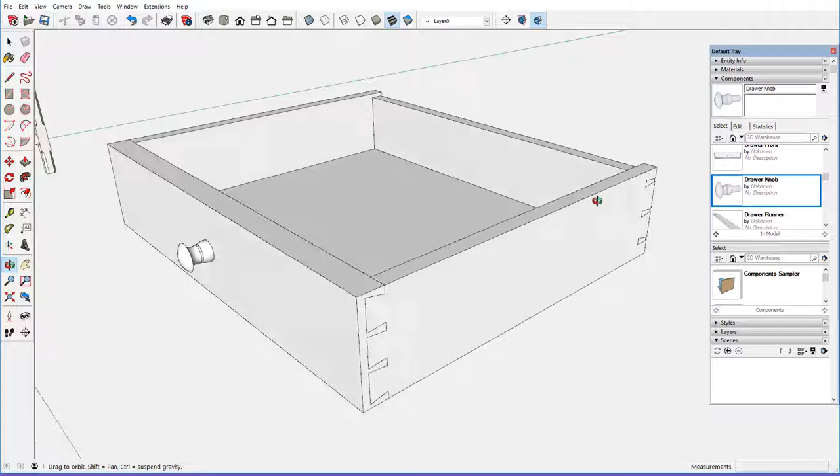I would like to do a couple edits on the drawer construction here. I forgot a couple embellishments that I think are important, and they have to do with the back end of this drawer construction. The first thing is to create a little bevel on the back top of the side component, so I'll edit the side component and draw in a slight bevel on the top edge.

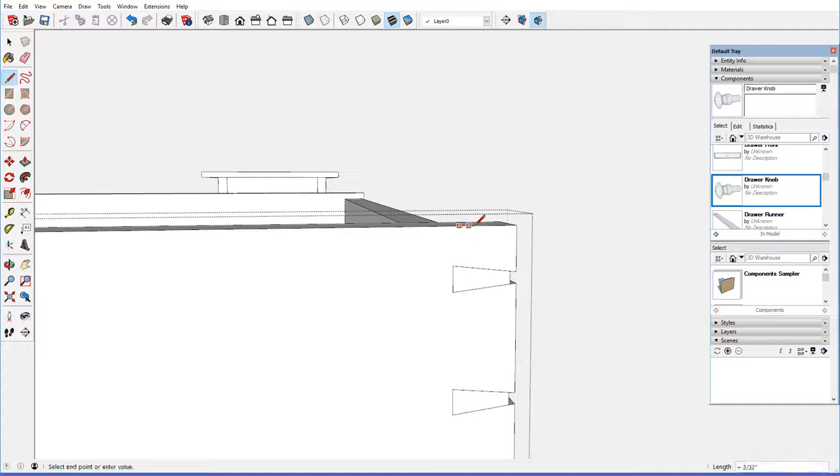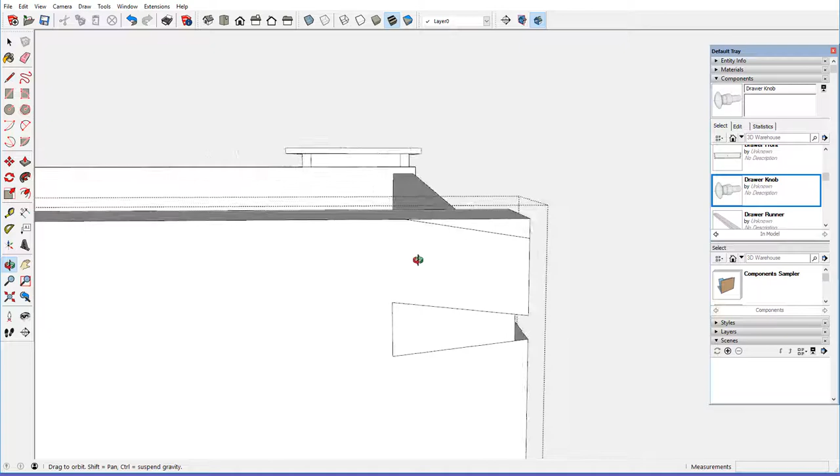This helps get the drawer into the case. It's about the same angle as the dovetail, and in fact I'll go a little bit more than that angle, about like that, and then push that out to the back. So we've got a nice little bevel there on that corner.

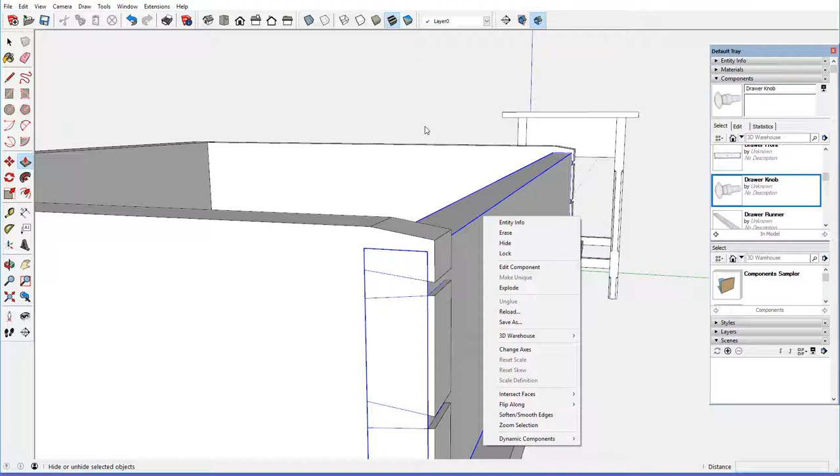The other thing I would like to do has to do with the top edge of the back piece, which needs to be beveled. Before I do that, let me hide this side so we can get a good look here.

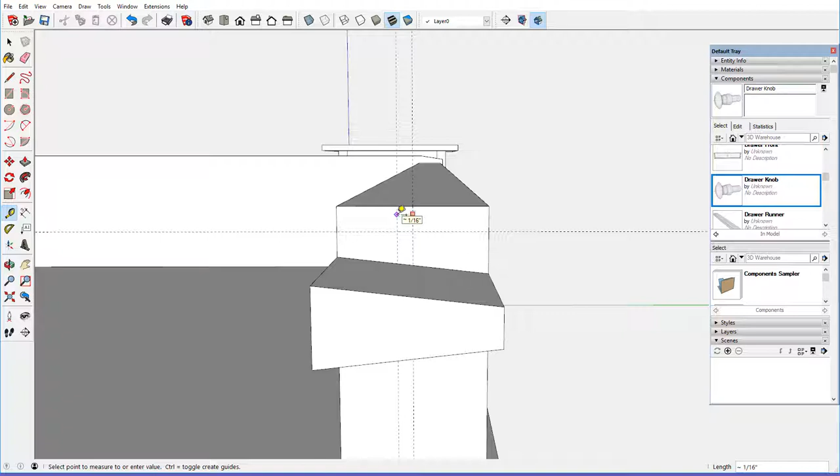I want to bevel this top edge here. I'll find the center and then maybe come down about that far with the bevel, and then go out. There's a little bit of a flat. Let me go about a 1/16, an 1/8 flat up here on the top, so another 1/16 there.

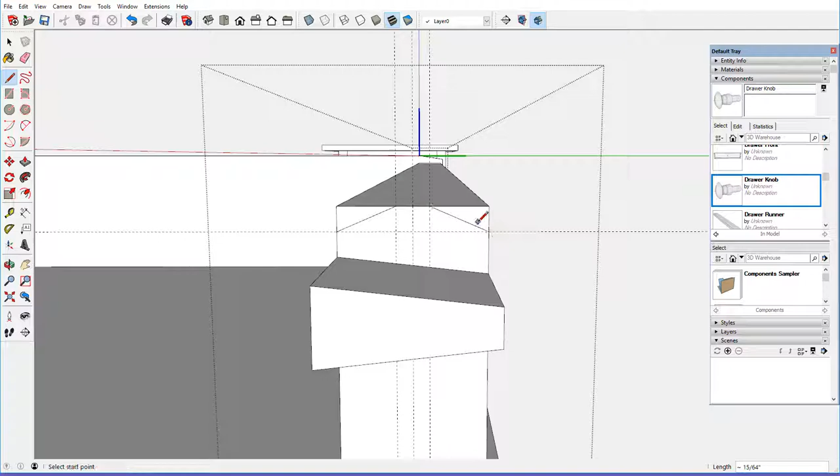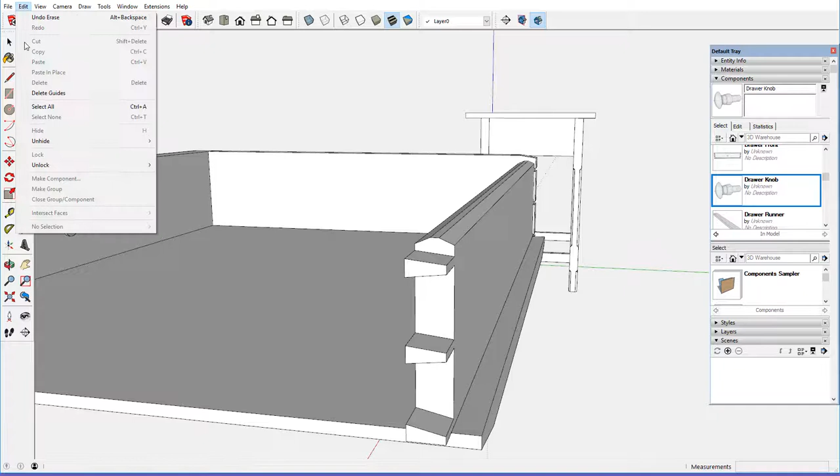Edit the component and draw in the bevel here and here, and then use the push-pull to go back to the back. Double click and close the component, get rid of the guides, and unhide the side.

Oh, there's one other little thing I like to do on the bottom. I want to cut this corner here, bevel off that corner, because that gets broken. I'll just come back maybe about 1/4 of an inch, like that.

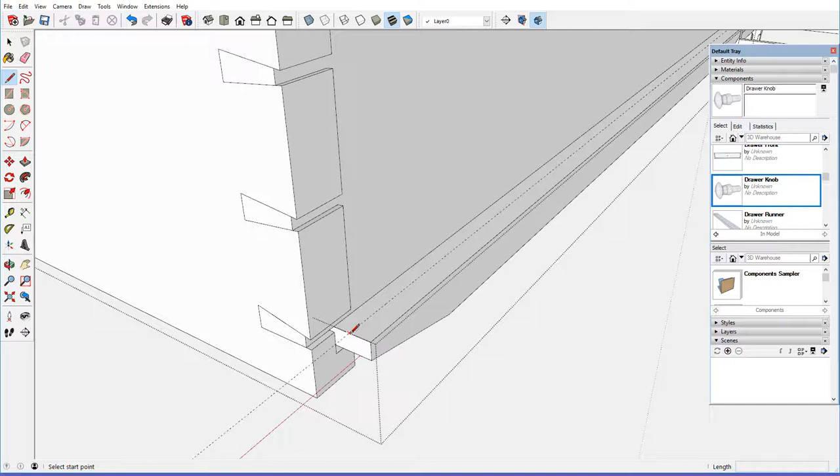Edit the bottom and come across here, and I've got that magenta color that gives me an equal to 45-degree angle.

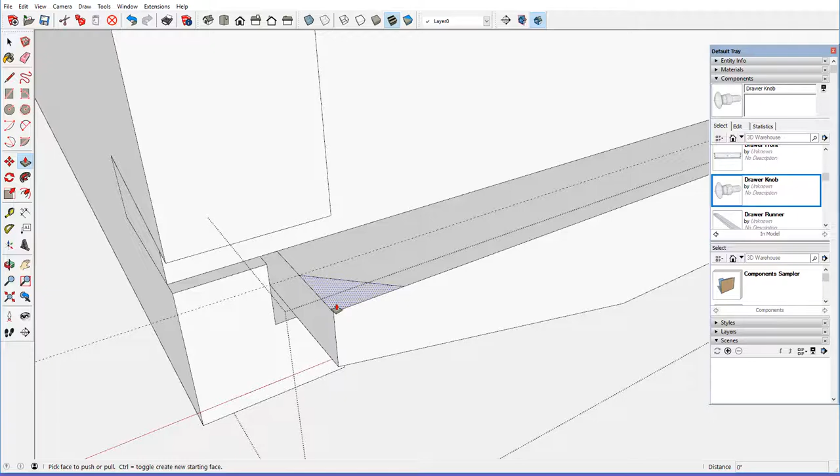Now this is tricky because I'm going through a bevel, another bevel down here, so I have to hit the control key to actually copy. I can't just push-pull that through because I've got this bevel down here, and I'm going to pull that through like that.

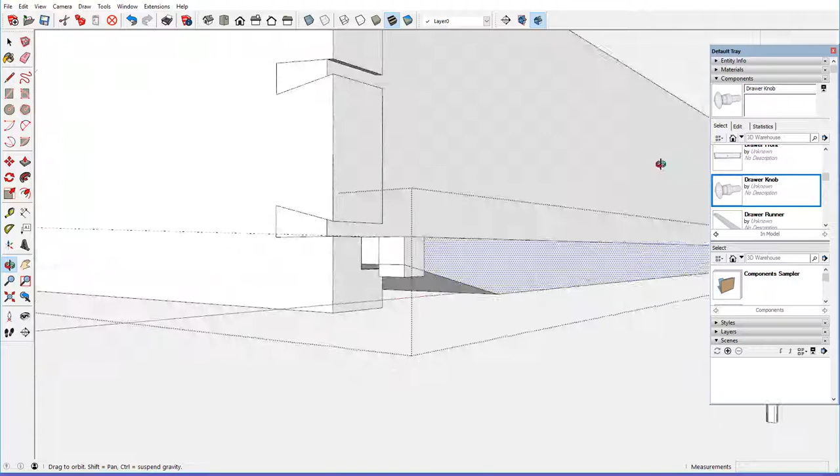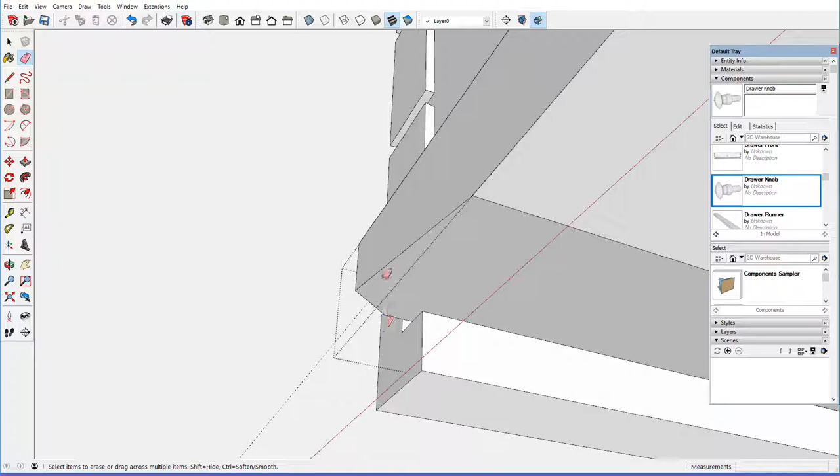The next thing is to do an intersect faces here with the model on that little beveled face, which now intersects, and I should be able to just use the erase tool to knock out this corner here, get rid of the waste cleanly, and reverse faces.

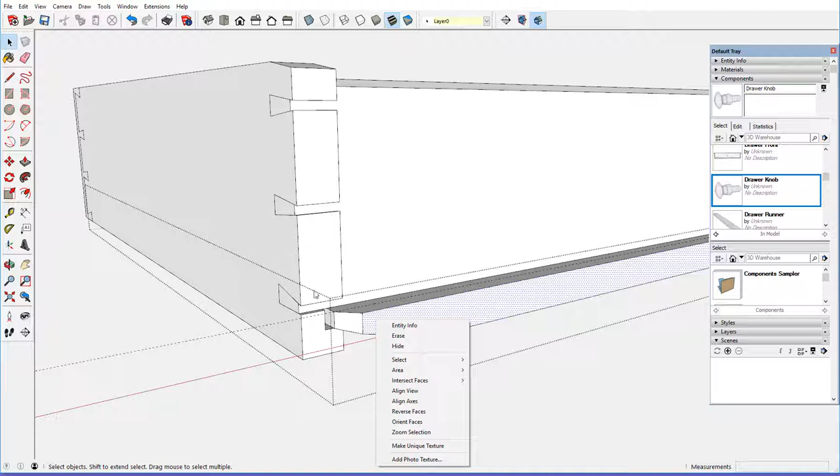And I've got a nice little bevel there. Now let me just try this: I'll copy that decoration there and pull it back to the other corner.

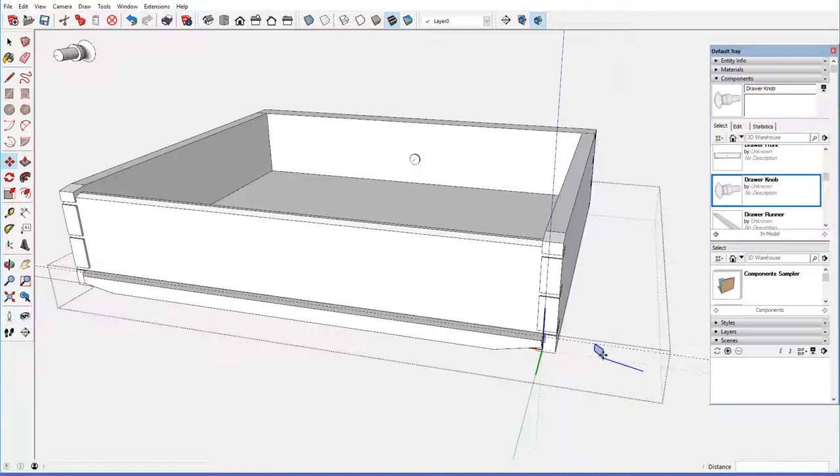Flip it on red, and then bring it back in, grabbing that corner, red axis, connecting it there.

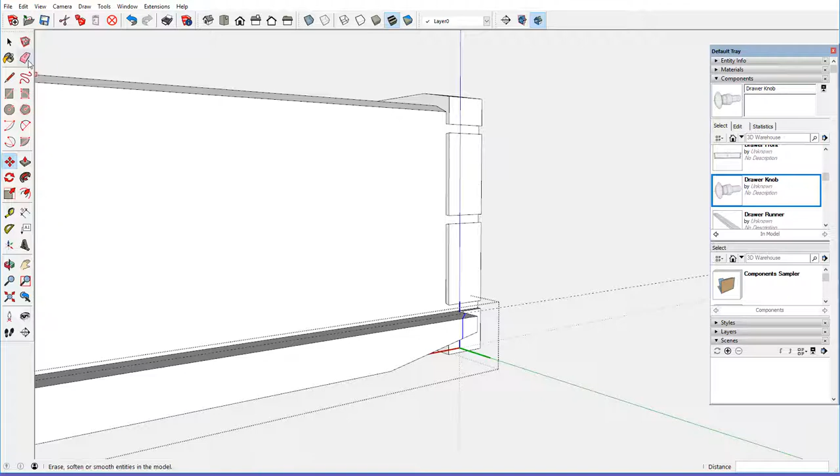Now, can I just delete that waste? Should work. And it does.

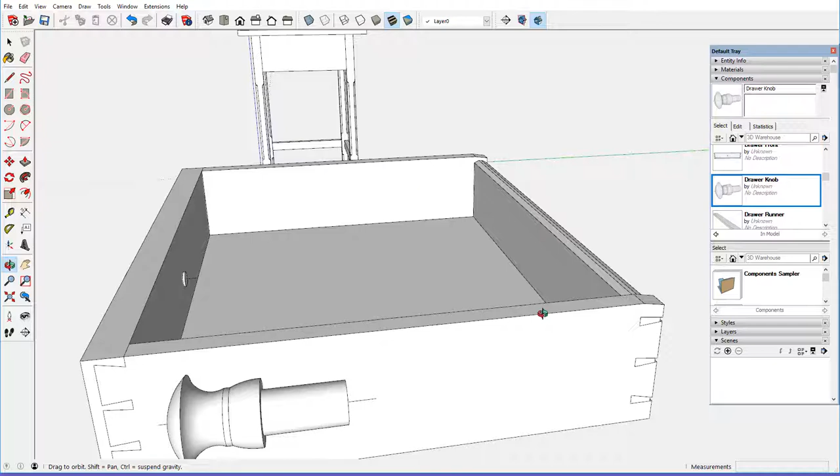Get rid of the guide. And we've got a better looking drawer with those little embellishments. So that completes an 18th century drawer construction.